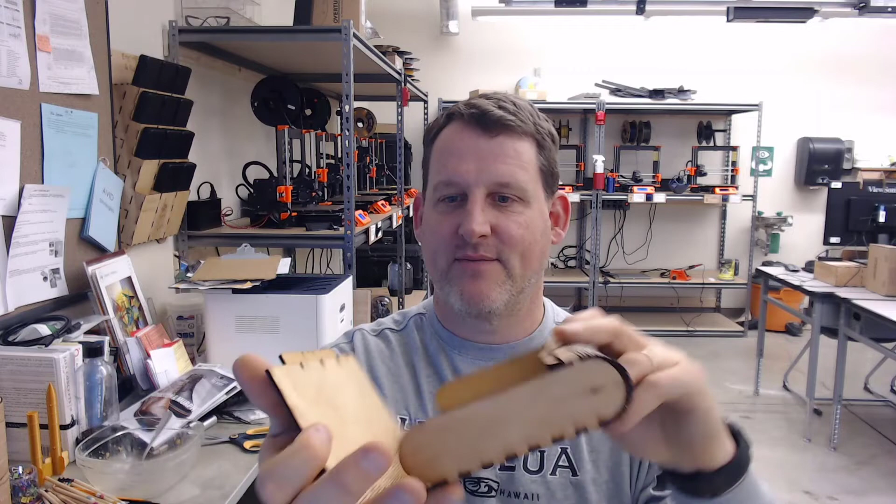You chose to start making the pencil case. So I call it a pencil case, but obviously you can put whatever you want in it and call it whatever you want. It opens up this way and we have this cool feature of making the plywood flexible by just cutting a bunch of little slots in it, and then suddenly it's just flexible.

It's called living hinges. We have it here and here, and then we have 3 magnets along the clasp up here, and that snaps it shut. So a cool project. It's pretty quick. Has a lot of cool features to it. Let's get down to it.

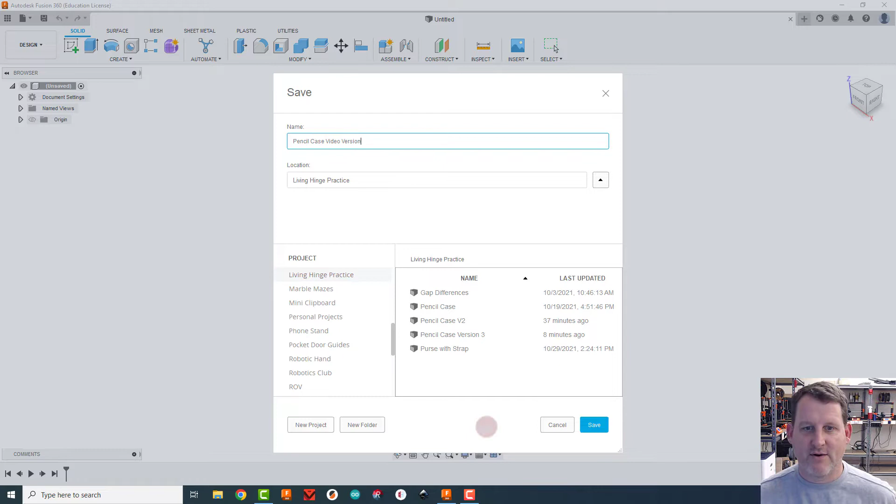First thing I'm going to do here is I'm going to save my file, and I'm putting mine in my living hinge location or my project. You can create a new project by simply clicking this down arrow here and choosing new project, typing in the thing, saving new project. I'm going to call this pencil case, but again, if you're not making a pencil case, call it whatever you want. Alright, I named mine video version because that lets me know of all the practice ones, which ones I actually recorded. Okay, so we've got our file saved.

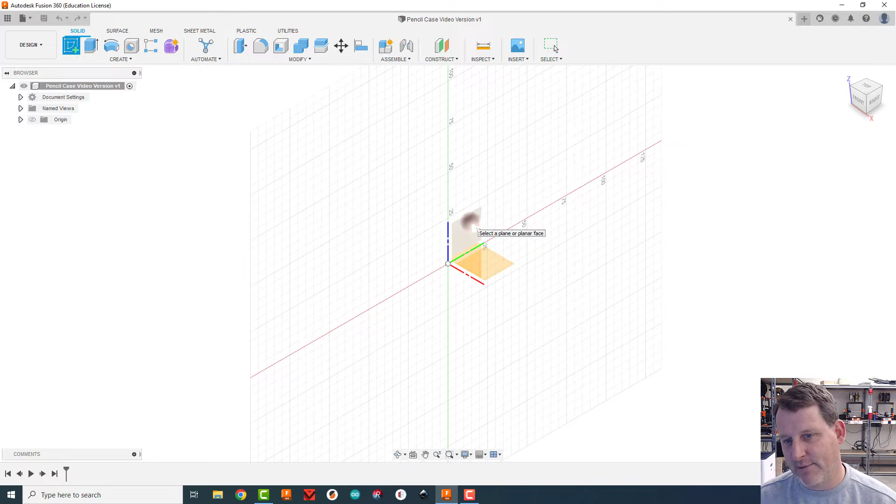We're going to create a sketch first. And what we're going to do is we're going to sketch out the shape of this face and then extrude it 1 thickness of plywood. So let's do that right away. I'm going to choose to create this sketch on my side plane here. I'm going to click there, and then I'm going to create a sketch.

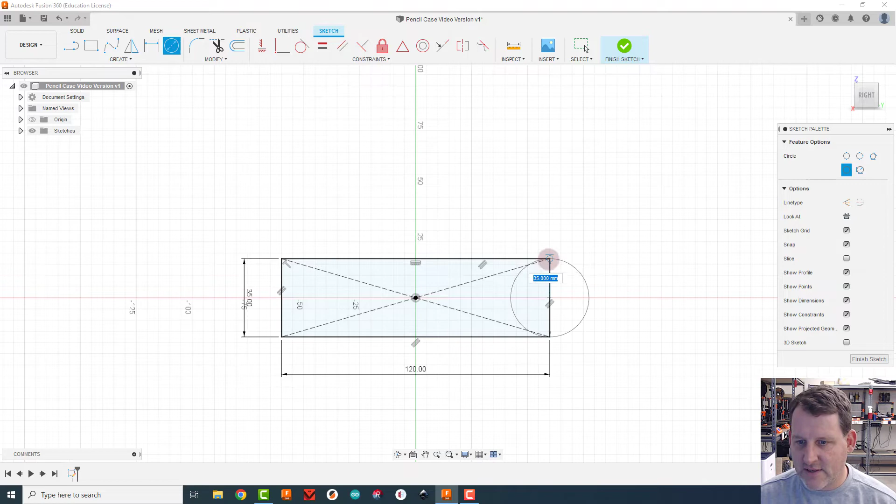The first thing I'm going to do is create a rectangle. I'm going to choose my center point rectangle tool and center it right on my sketch. And this rectangle needs to be 120 wide by 35 high. Enter. Now I'm going to click a circle. I'm going to find the center of this side over here. I see a little triangle, so that's the center. And then drag it up to the very top of the rectangle there. Do the same thing on this side. Grab my circle tool, find the center, drag it up to the top.

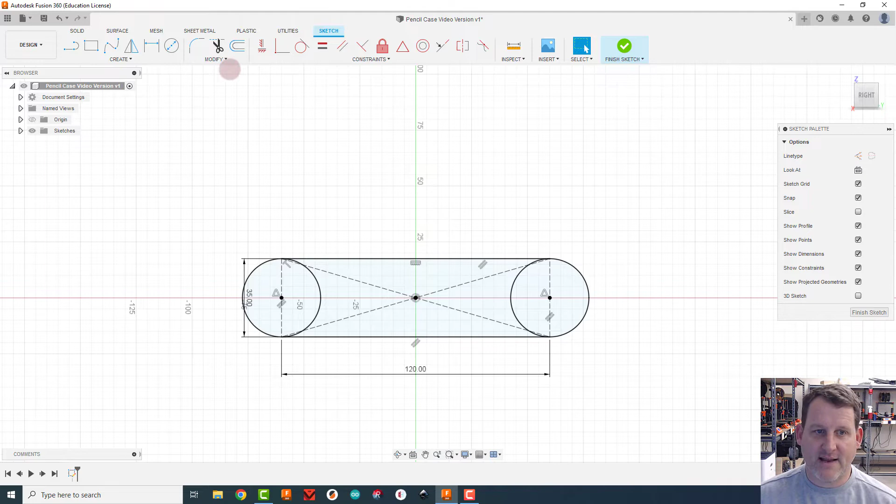Everything is happy. Now before I extrude this, I'm going to actually turn these lines into construction lines. So I click on this vertical line here and just hit X to turn into a construction line. Here, X. That way when I extrude, there's less to click on. Now, before I extrude actually, I need to create a parameter for the thickness. So I'm going to go here to the Modify menu, come down here to Change Parameters. And where it says user parameters here, I'm going to click the plus sign and I'm going to name this parameter thickness.

Now my advice to you is go over and grab some of the plywood we'll be using and measure its thickness. I like to grab 5 to 10 sheets of it and measure them all together and then do that number divided by 5 here. So it might be something like 13.56 or whatever you measured divided by 5. And that would be the actual thickness of 1 sheet. By measuring 5 of them, you make less error than just by measuring 1 of them. I happen to know that this plywood we're using today is 2.65 millimeters in thickness, so I can put that right in there.

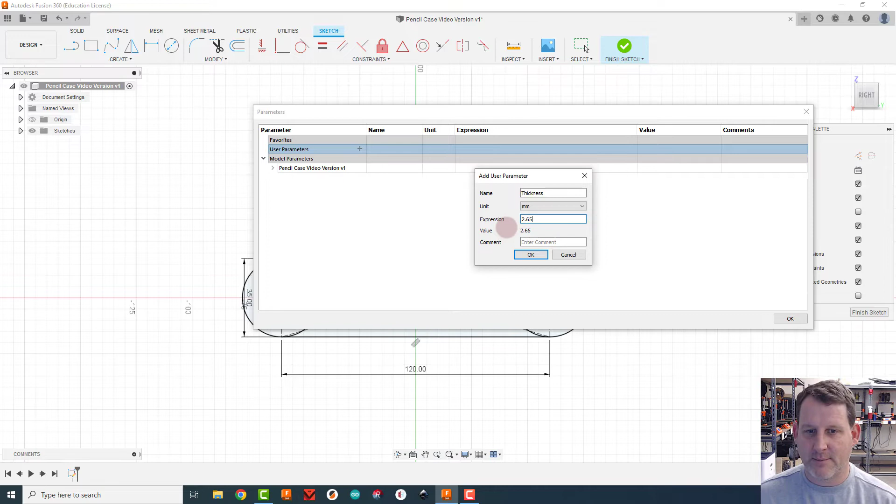And you might be asking, well, why do we need to make that parameter? Well, we don't need to. We could just type in 2.65 every time we do the thickness of the plywood, but that poses some problems. First of all, you might make errors typing it in at some point, and that could screw up everything. The second thing is, if you wanted to go back and change the thickness, say the plywood in this batch was 2.8 instead of 2.65, you could just come here to the parameters page and change this 1 number, and that 1 number will ripple all the way through your design. So it makes life easier in that way too. So parameters are really cool things to use.

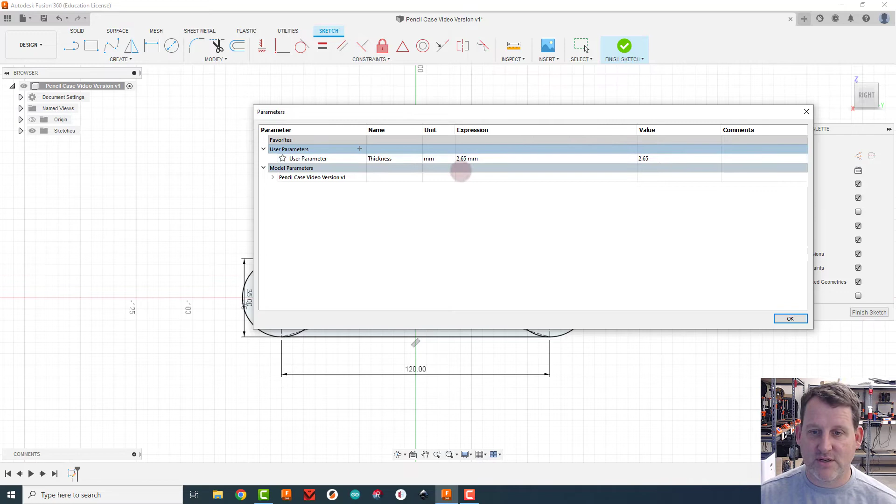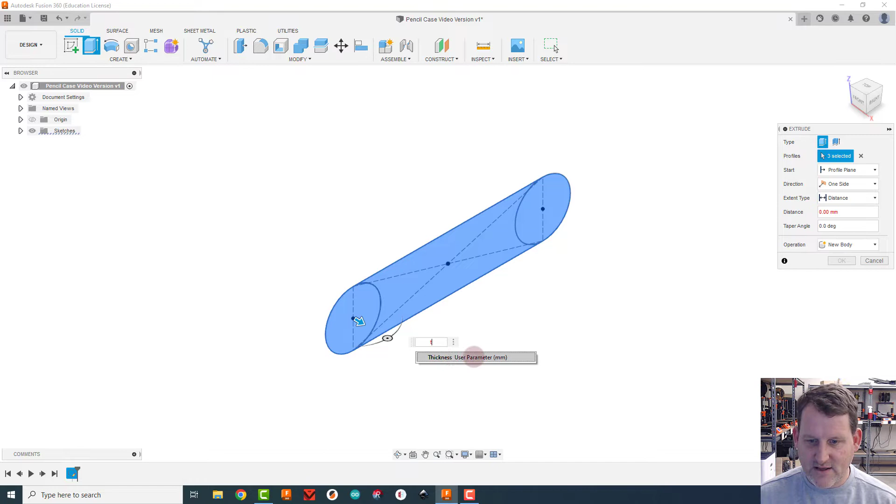All right, so now we're going to extrude. And we're going to extrude this entire shape out, all 3 of those pieces, and we're going to do it out the thickness we just put in. So to get that thickness number, instead of typing 2.65, type in T, and then see how it brought up thickness right away? Once you see the one you want here, you can just go ahead and push Enter. That'll put the whole word there, and then 1 more Enter to actually make the extrusion happen. So now we've got an extrusion here that's the thickness of a piece of plywood.

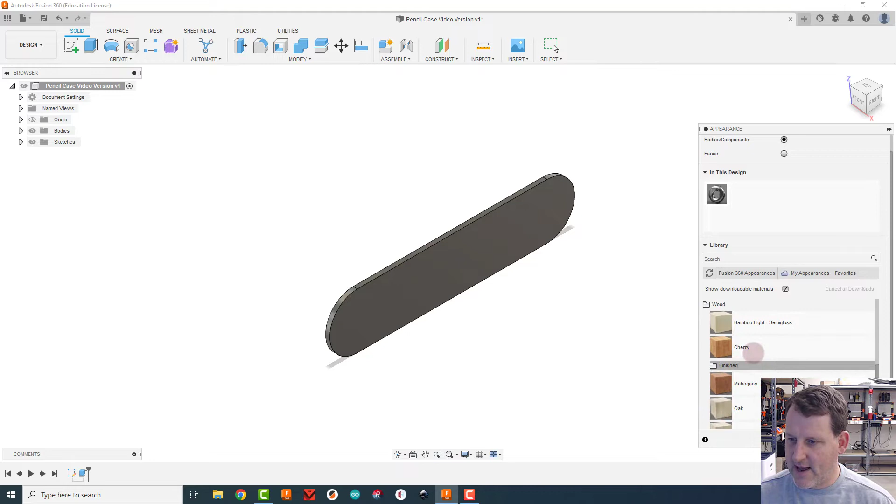All right, now I'm going to do A for appearances, and I'm going to add an appearance to this. I'm going to come down here to wood, and I like the oak one. I'm just going to drag oak right onto it. If you've got a little download symbol here, all you've got to do is click on it, wait a few seconds for it to download the file, and then you can drop the oak onto there.

Awesome. Choose any wood you want. I just want to make sure we know what each piece is made of. So we're going to hit close here.

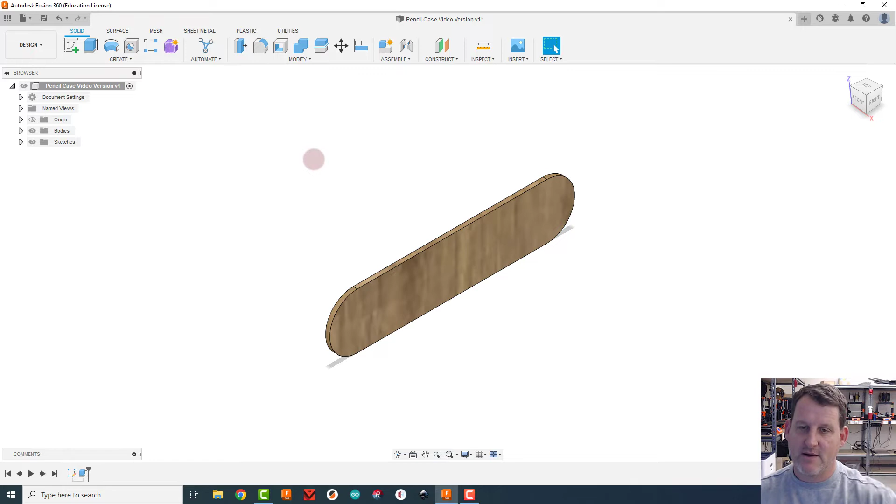All right, next thing we want to do is create an offset plane in the middle of our pencil case. Our pencil case can be 200 millimeters wide, so we're going to make an offset plane 100 millimeters away from this face right here. So I'm going to click on this outside face and drag it in this direction, and for me that's negative 100. That's halfway across the pencil case. Now, why do we create a plane halfway across the case?

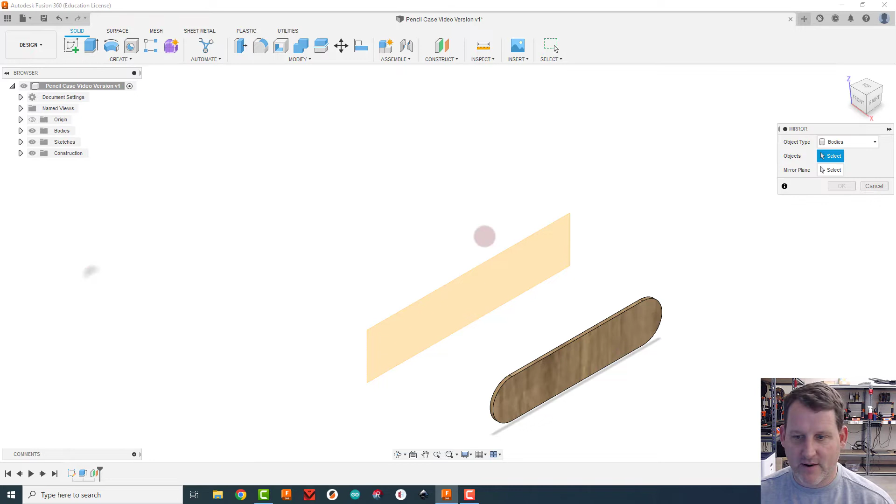Well, we can do this cool thing now called Create Mirror, and we can click on this object, and we can click on the mirror plane. Well, first of all, actually make sure it says bodies here, not faces, features, or components. You want the full body to mirror. The object that you're going to select is this object, and then the mirror plane, when I click up here on mirror plane, I'm going to tell it I'm mirroring it around here.

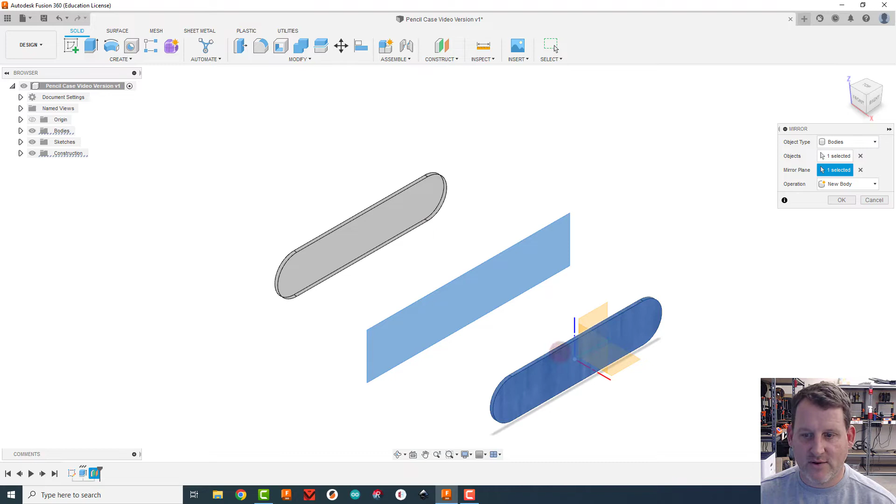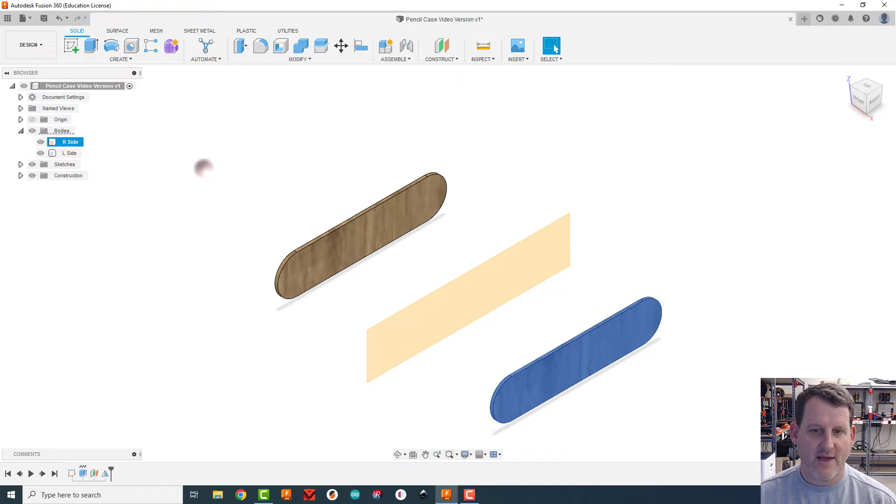It'll show you a preview. That's what it's going to do. So it created this body over there. And I'm just going to say okay. And now in my bodies folder, I notice I have two bodies. So I'm going to name these real quick. That's going to be the left side, so I'm going to call this L side. Enter. And the other body, yep, that's the R side. Not surprising. Enter. And those are my two sides of my pencil case. Awesome.

Next thing we're going to do is create a piece of plastic. Well, not solid, but we'll create a piece of plastic that goes from this round corner to this round corner to create some structure in there to help make this stronger. To do that, I'm just going to create a sketch on this inside face of my left side.

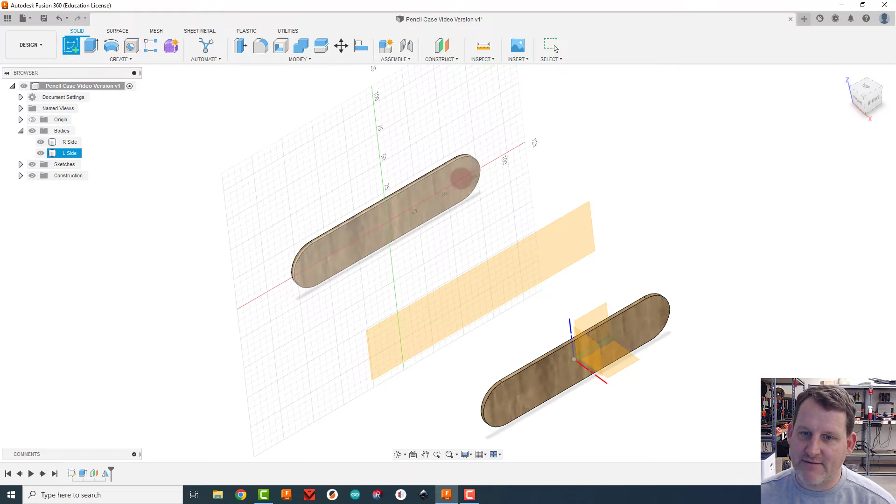Click on it. And then I'm going to hide the right side, the left side, and this construction plane. Now I can just see that far left-hand side that I have the shape of. What I want to do now is I'm going to create a line. I'm going to come in here, and I want to create a line, right?

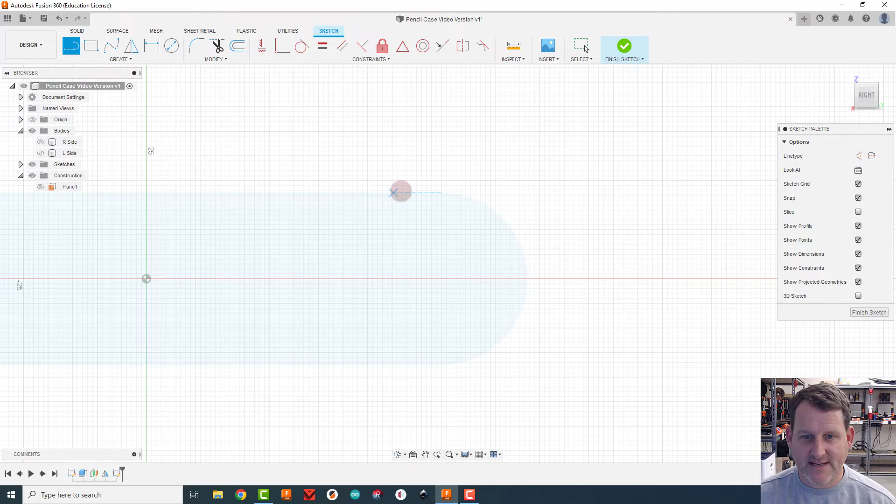Let's see, square up to the right side real quick. And right here is where that curve stops. I can see how it comes over and then it hits this square thing. That's where the curve starts. So I'm going to draw a line down to that. And now I'm going to extrude this.

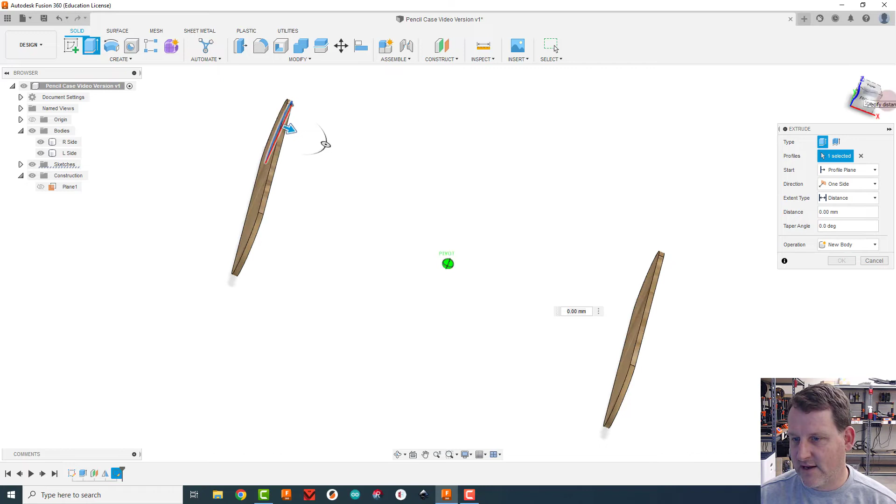I'm going to turn my left side and my right side back on. I'm going to hit home so I can get back to my original view. And I want to extrude this body from here all the way to the other side. So I'm going to rotate so I can see the inside face of this one. And I'm going to say to object instead of distance on my extrude menu. And then click on the inside face of this one, and you can see it brings it all the way over.

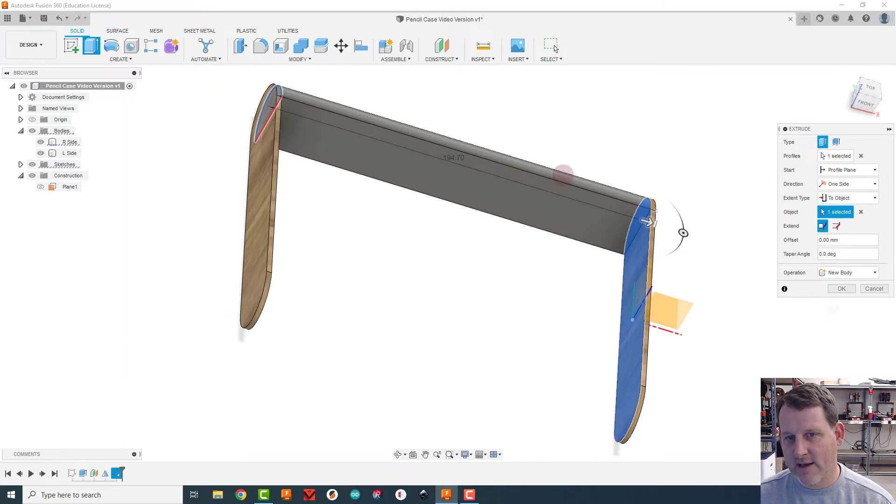Now right now it's trying to join it, so you can see how it's made these three pieces all one piece. We don't want that, we just want to say new body, and now it's turned it back to gray, and click OK. And now I've got a third body here, and I'm going to call this the back end. Hit enter, OK.

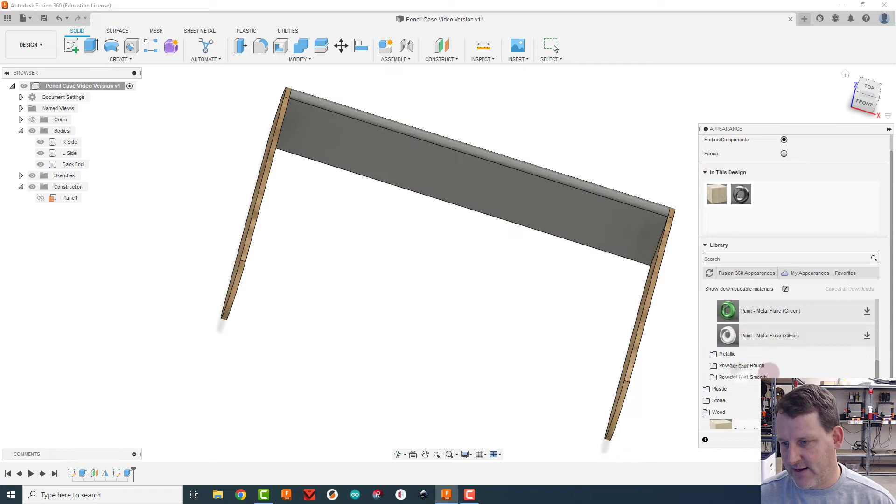Now I'm going to bring A for appearance back up, and I'm going to make this whatever color plastic I think I'm going to make. I'm going to choose paint here. There's not really good plastic options. And I'm going to do this as metal flake. I think they look pretty cool. And you know what? I'm going to make mine red. I'm going to put red right there and then hit close. All right, awesome. So now we've got the right side, the left side, and this back end piece done. But we don't need this back end to be a solid piece of plastic.

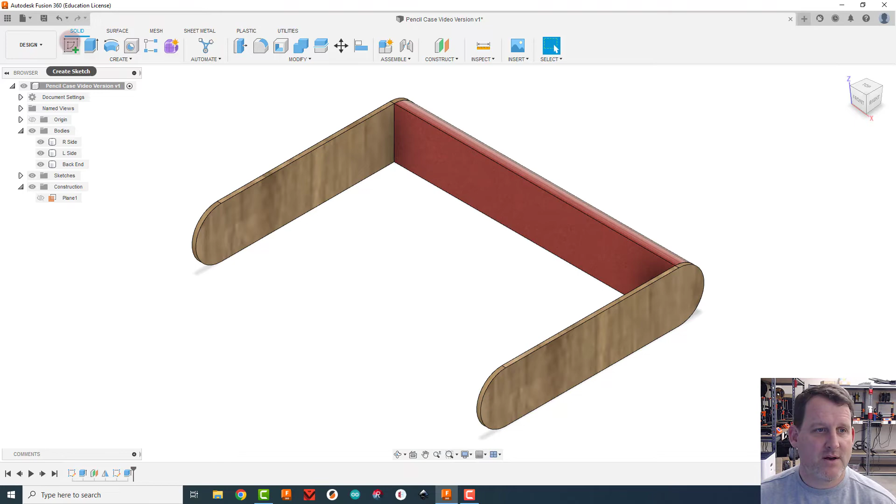We're going to carve out some pieces from it, and I'll show you a cool technique for that. So I'm going to come here and create a sketch right on this face, and then I'm going to hide the left side and the right side.

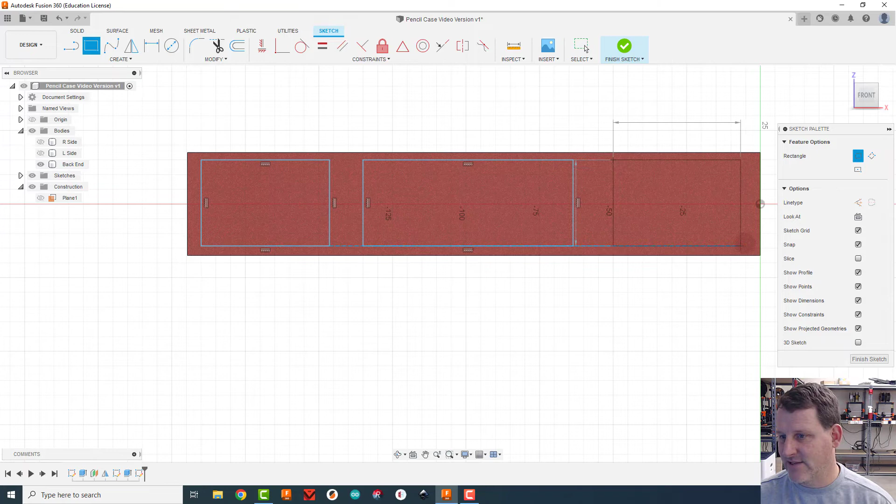I'm going to zoom in here and create a rectangle inside the box anywhere. All I want to do is not let it touch the edge, and I'm going to create 3 rectangles. Doesn't matter how big they are or where they are, as long as they're not touching anything. They're just inside somewhere. And now I need to dimension these off. So first thing I'm going to do is hit D for dimensioning.

So these rectangles are the part that we're going to core out. We're going to core it out kind of like you core out a cantaloupe when you're scooping cantaloupe with a spoon. You can just spoon it out. I'll show you, it's a cool technique. But we're going to hit D for dimensioning.

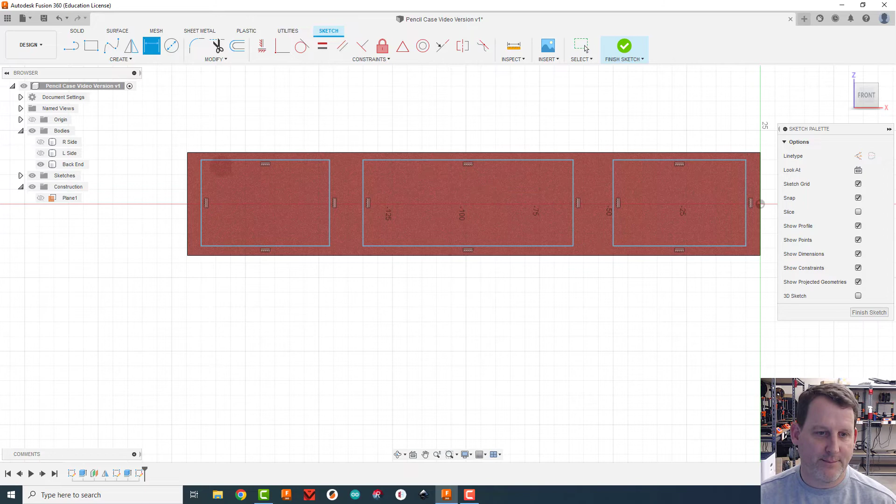We're going to click on the left side of this rectangle and the left side of the plastic piece, and we're going to type in 2 millimeters there. And we're going to do that same 2 millimeters between all of the pieces. So I'm going to do the right side of this one, the left side of this box, and come up here and click up at the top.

Instead of typing in 2, watch how cool this is. I'm going to come over here to this tool and just click once. It's going to put D11 in there, which means it's going to put whatever dimension that is in this box. I'm going to hit enter. I'm going to do the same thing on this one. So the right side of this box, the left side of this box, come up here into the white space and just click. Click on the last one I did just once, enter.

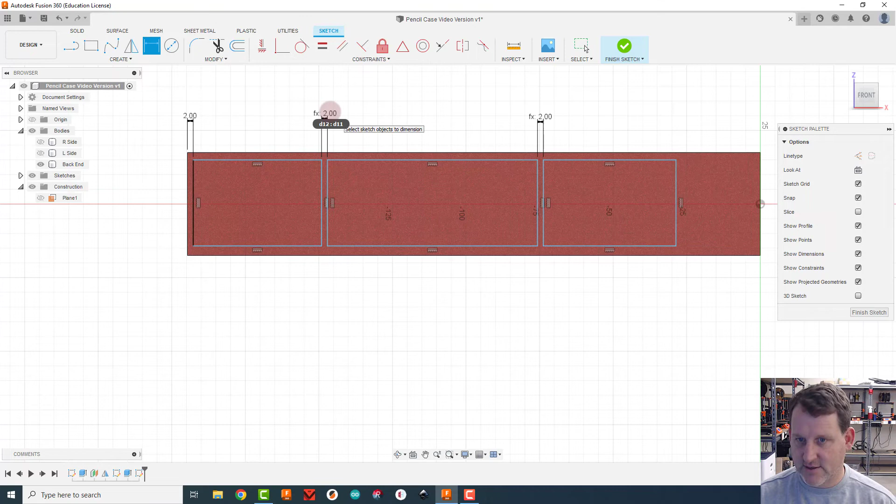And now I'm going to click on the right side of this last rectangle and the right side of the plastic part. Click up here, click once on this last measurement I did and hit enter, and now they're all 2. And watch how cool this is.

I'm going to hit escape to get out of the dimensioning tool, and because I dimensioned them all together, if I change this one to 3, they all change to 3. So instead of changing it 4 times, I just change it once. It's a really cool trick. I'm going to change it back to 2.

And now I'm going to dimension the top to this one. So dimension from this top left one to the outside edge of the plastic. Then come over in the white space and click again and make that one 2 as well. In fact, I might even just do the same trick here. I might click once here and say they're all going to be the same.

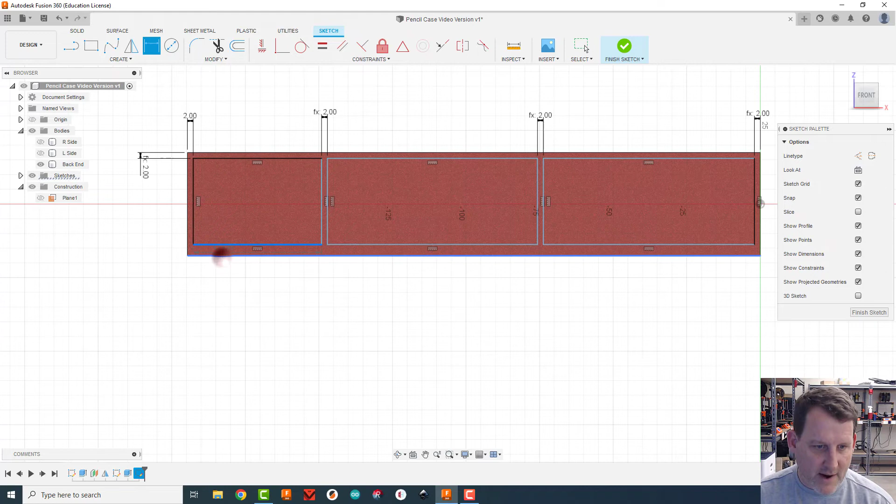Come down here and click on this one, the bottom part of the rectangle, the bottom part of the plastic piece, over here in the white, click one more time, and then click on that last measurement I did, enter, and now they're all 2.

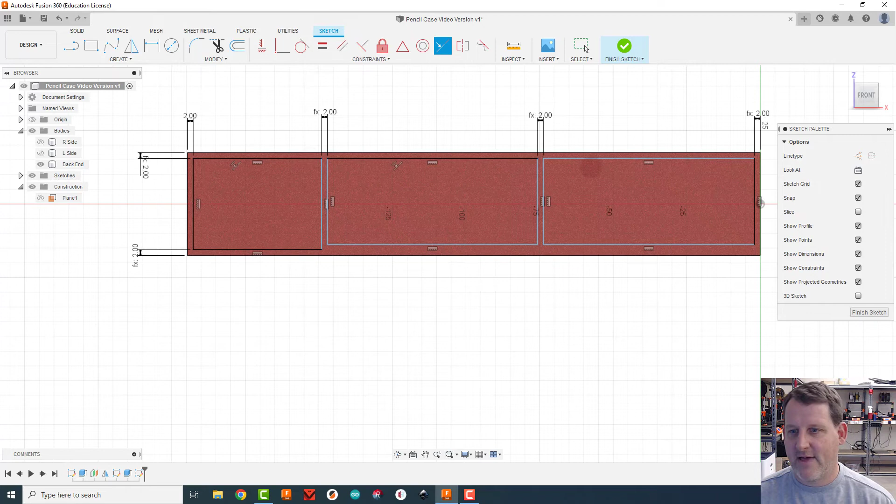Well, I could keep doing that on all of these, but it's even easier just to use the collinear tool. Remember, collinear means take 2 lines and line them up next to each other. So I'm going to say, I want this one to be in line with that line, and then I want this third top line to be in line with the middle one. Now they're all in line with each other. Same thing on the bottom. This bottom one should be in line with this bottom one, and then this one should be in line with that bottom one. All right.

Last thing I want to do is make these openings, all 3 openings, exactly the same size. You can see if I hit escape, these are still blue because I can drag them bigger and smaller. So instead of trying to define how big this size is, watch how cool this is. I want all 3 of these to be equal. So I'm just going to get my equal constraint.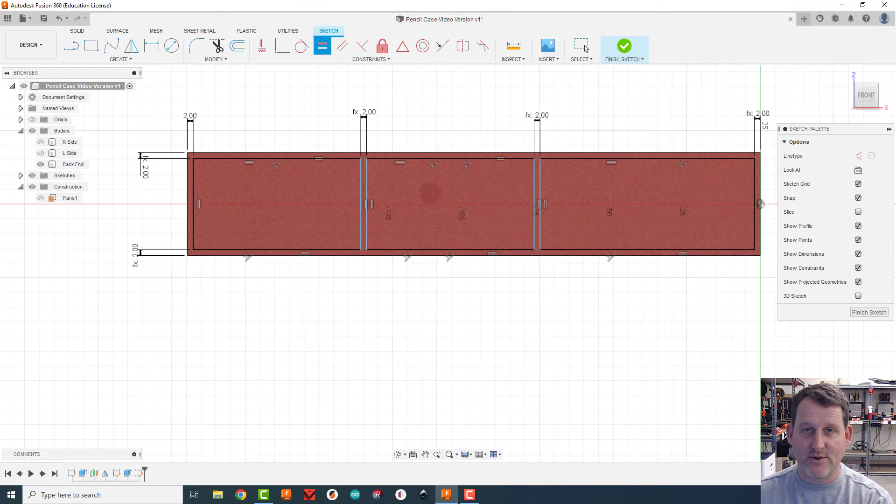I'm going to click on this top line and this one. That made those 2 equal to each other. And then I'm going to click on the middle one and the far right one. And now that made those 2 equal, which means the first one's equal to that one as well. Oh, the logic. So now I've got them all made.

One more thing I need to do is cut them all in half. So I'm going to grab my line tool, and now I'm going to find the midpoint there with a little triangle, and then come straight across to the other side of the rectangle and click on it.

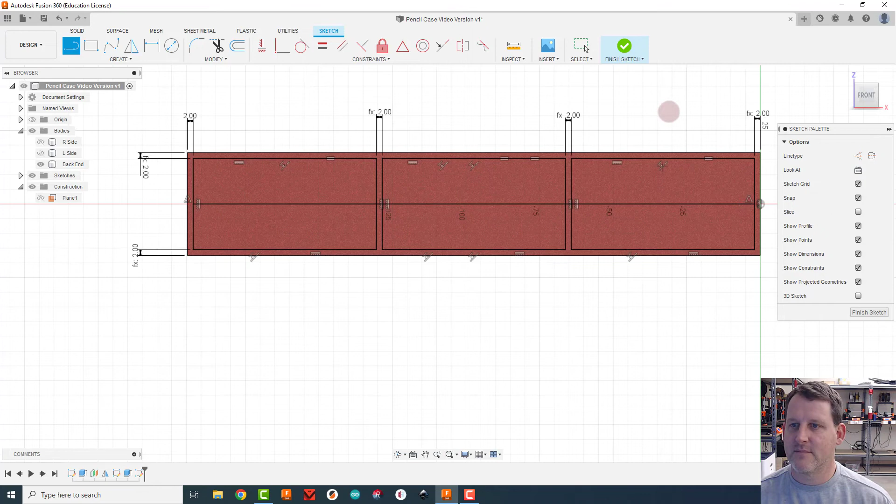And then, so now if I tip it a little bit, I'm going to escape to get out of that tool. If I tip it a little bit and hit extrude, you can see that if I try to extrude these pieces in a regular extrusion, they're going to break through because they're a flat extrusion. So that's not going to work. So I'm going to hit cancel there.

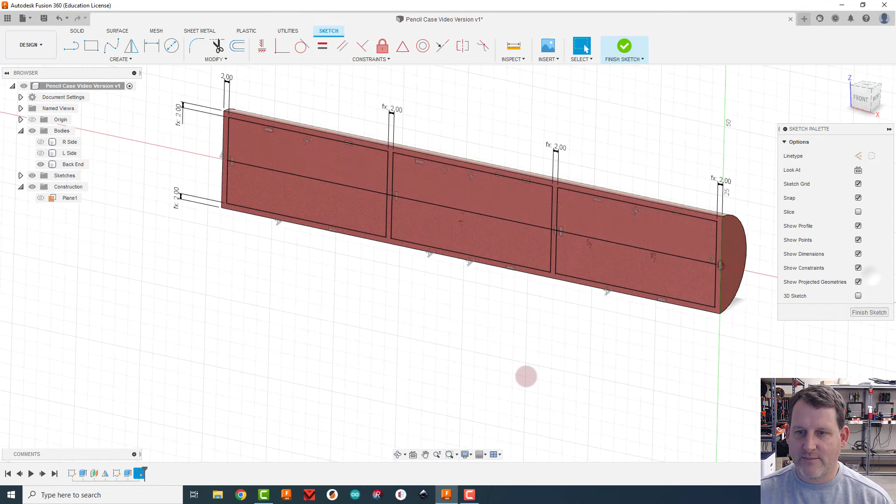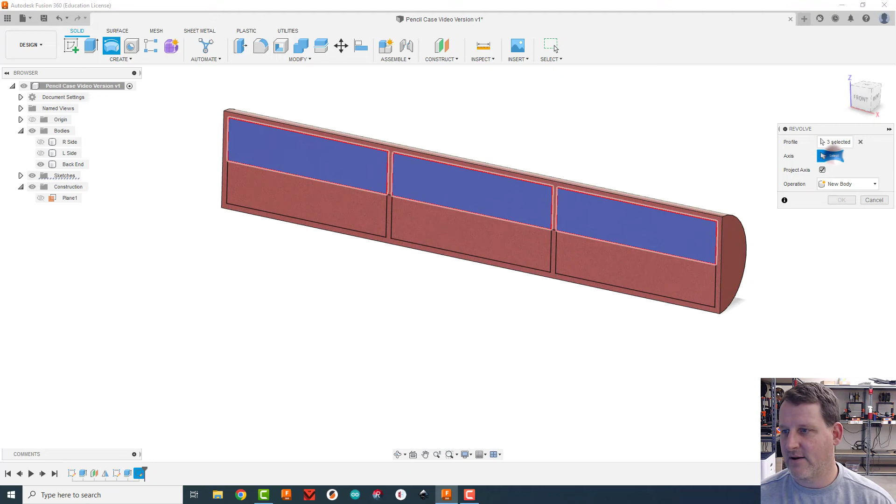What I want to do instead is take this rectangle and scoop it around and just scoop out that inside piece. To do that, I need to do finish sketch and use a really cool tool called the revolve tool. So revolve, I'm going to click on these top 3 faces, and then come down here and click on the axis that I want to revolve them around, and that's going to be this middle line right through the middle here. You can see I've got that blue line all the way across the middle. Click on it, and it just revolved them.

Now it revolved them all the way around. Let me undo it so you can see what happens. So I'm going to come around, and I'm going to just scoop it. See how when I go into it like this, I'm just scooping out the inside. And it turns that kind of bright red cutaway look. I only need 180 degrees. I could keep going on the outside, but that doesn't do anything. I just need 180 degrees.

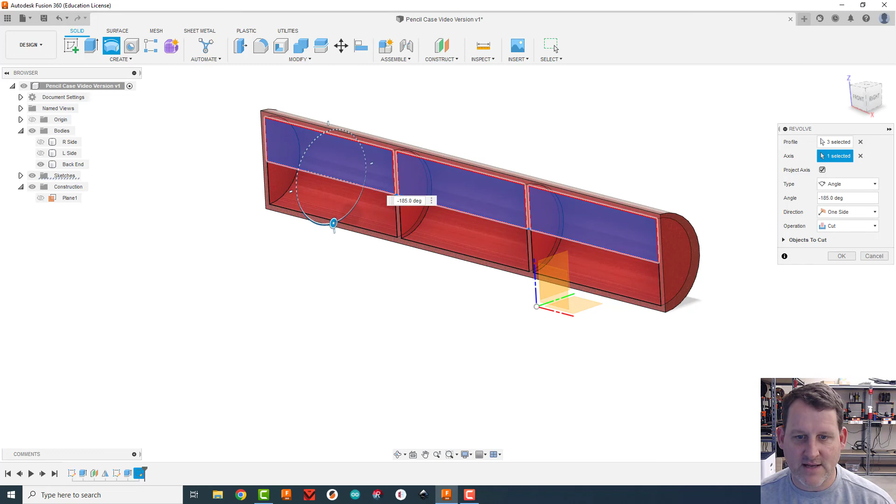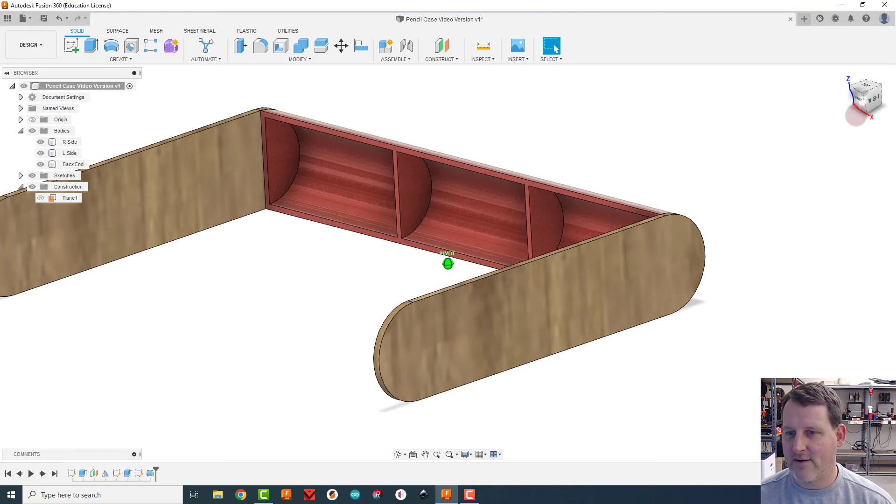Now, if I went the other way, watch how cool this is. I could actually create new material in a scooping shape this way. But I don't want that. I want it this way, and I want it to be 180. And then I'm just going to click OK. And now I've scooped it out. I've got this support piece. Let's turn our right side and left side back on. And now I've got something that's going to support the bending wood around the whole edge.

Now I need to make another one of those on this side. So I'm going to do something really easy, which is just mirror that. So I need something right down the middle, a midplane here. But if I come here and say midplane, and I click on this side, there's nothing for me to click on this edge. So I've got to do it in a little more complicated way. Because my 2 outside edges here are circles or curves, I need to come here to construct, and I'm going to do a tangent plane first.

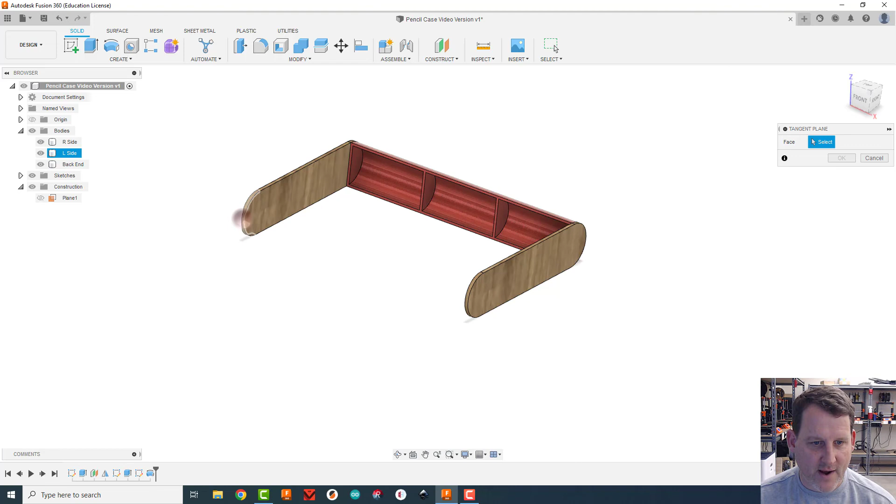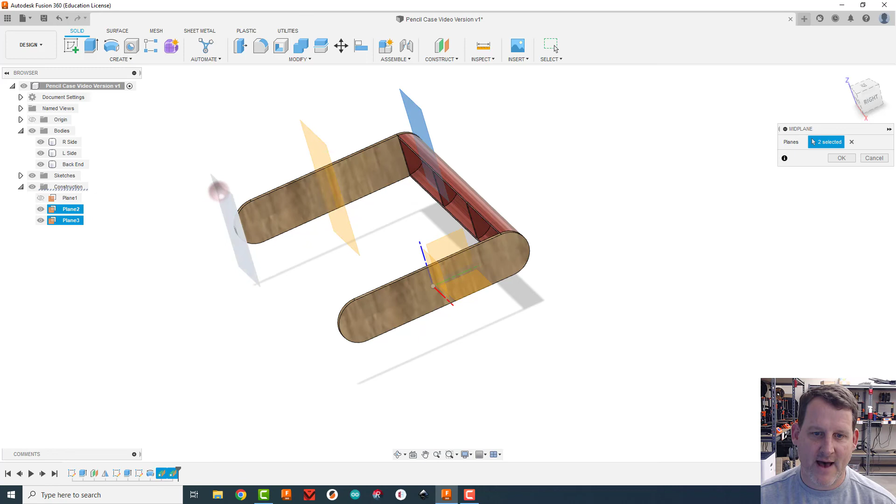I'm going to click on this outside curved edge right there. It's going to create a tangent plane that's vertical right there. So I'm going to say, okay, great. And then I'm going to do the exact same thing again, construct, a tangent plane on this edge here, and then say, okay, great. And now I've got these 2 planes that are on my outside edges. I can create a midplane with them. So here, construct, and we do midplane between this plane and that plane, and now it just created me a midplane. And I'm going to say, okay.

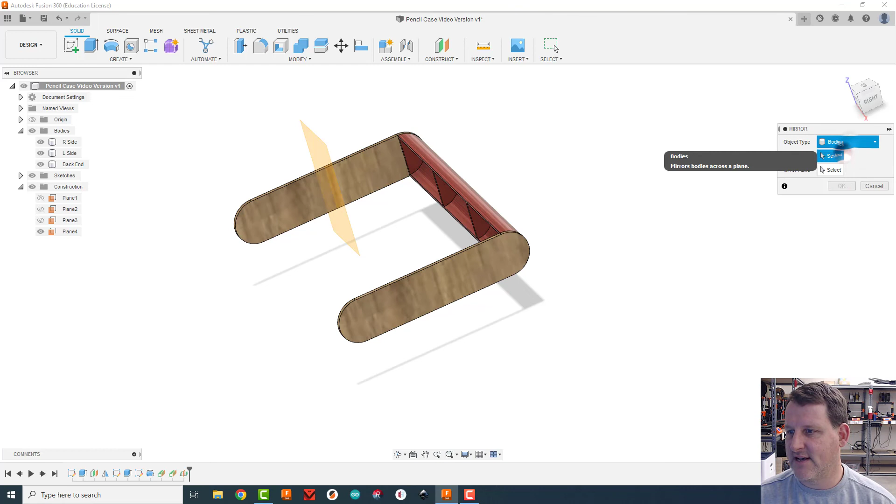I'm going to have my construction plane folders open. I'm going to turn off plane 2 and plane 3 because I don't need them anymore. I just needed them for this one. And now I'm going to do create a mirror. I want to make sure this top one says bodies. And for the objects, I need to select what objects I want to mirror. Well, I'm going to mirror this piece. And then I'm going to choose my mirror plane by clicking on this part and then clicking on my mirror plane. And right away you can see it's going to create another one on the other side, just that easy. Click OK. Awesome.

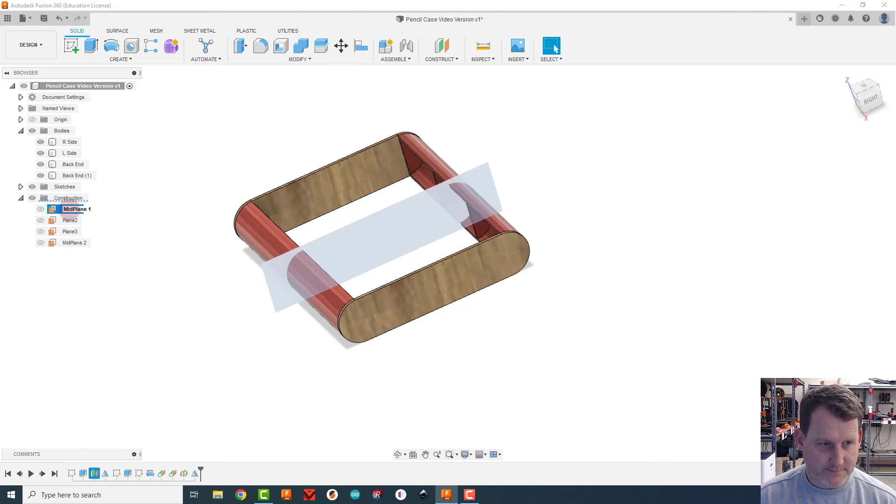I'm going to turn off plane 4, and I'm actually going to name plane 4 mid-plane 2. Enter, and then click back on plane 1, and that's my other mid-plane. I'm going to click on it again and call it mid-plane 1. So those are my 2 mid-planes, and they'll be easier to find now. Okay, awesome news. We've got everything done. This back end, I'm actually going to rename it to front end. Enter, and that's that one.

So I'm going to go back out to home, and I think we're going to stop there for this video. Great job so far. In the next video, we'll start creating some more of the joints and features.